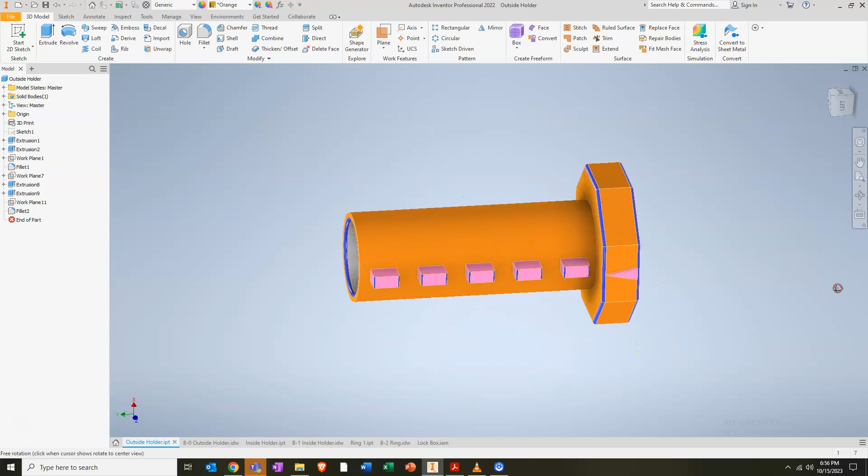Here's the part before we get started. So let's go into new, let's go to a standard part. What I'm going to do right away is a file save as, and where I need to save this in my OneDrive, like you all are already doing, is in drafting, 3D printing, weekly projects.

This one is going to be called WP6. There's various projects we're going to do throughout the year, and this is going to be a 6-week project. I have other videos of other projects, puzzles, hinges, Christmas ornaments, Halloween ornaments, and all that fun stuff, but we're going to do the 6-week project.

Inside here we're going to make two different folders, one called parts and one called assemblies. Remember, you've got to have all of this done in your OneDrive. So we've got parts, assemblies, and drawings. We're going to be in parts, and this one is going to be called B-0 outside holder.

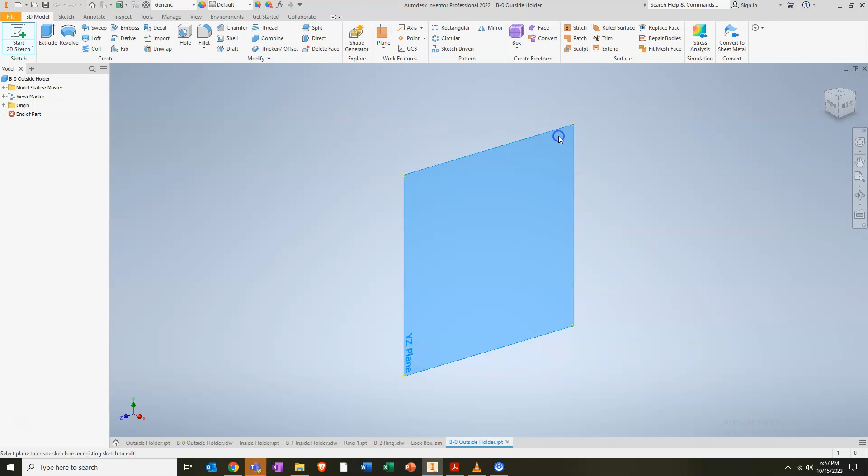I want to make sure our parts are all named appropriately before we get started, and I'm going to start on this Y and Z plane here. What I'm going to do is steal dimensions from this to kind of gravitate our way through making this part. I can tell already that I need to be at 29/32nds with 3/4.

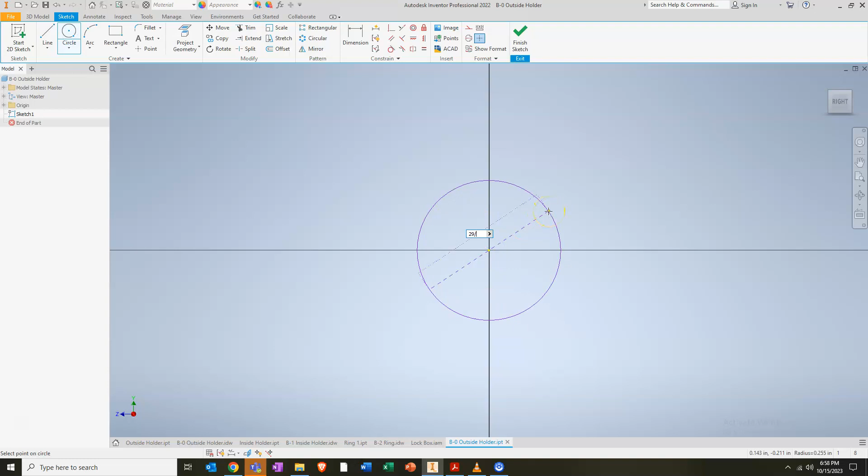So we're going to come into here. I'm going to start one, I'm going to type 29/32nds and 3/4. Remember, you can do decimal or fraction, but either way, when you pull up, they'll show your fraction, but they'll keep them in their decimal format.

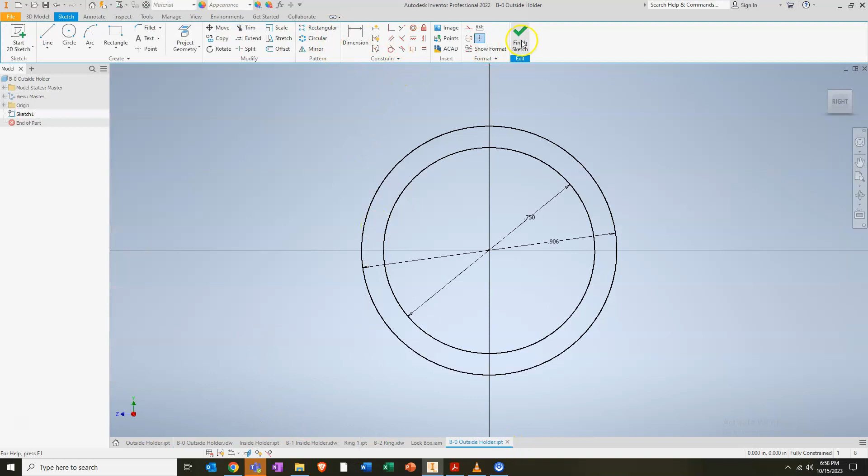Alright, so now that I have that part, what I'm going to do is kick it going forward 2 3/8. So let's finish our sketch and kick it forward 2 3/8. I know the decimal format, so I'm going to type it. Now notice I did the whole thing, but remember, I've got to kick it going back the other direction too. So I'm going to draw the entire sketch first before I extrude it the other way.

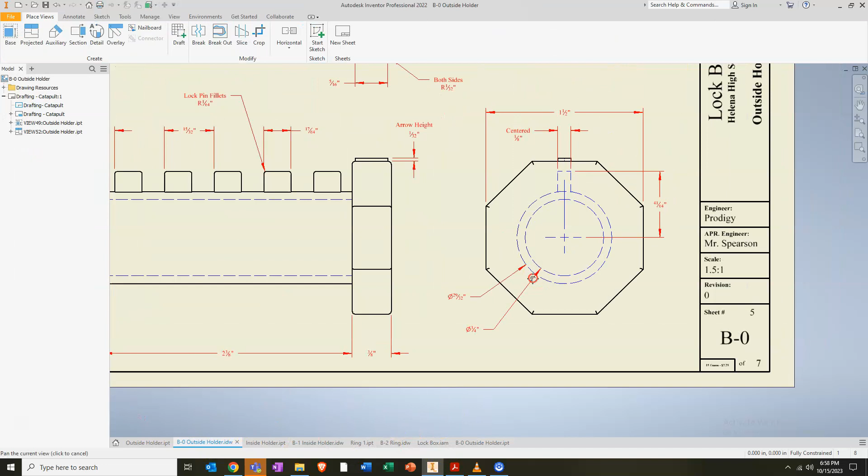So let's go back to the original sketch. Now what I want to do is bring up the overall diameter, which is another circle of 1.5 inches, and then I'm going to put in something with 8 sides of a polygon. So 1.5 inches, here we go.

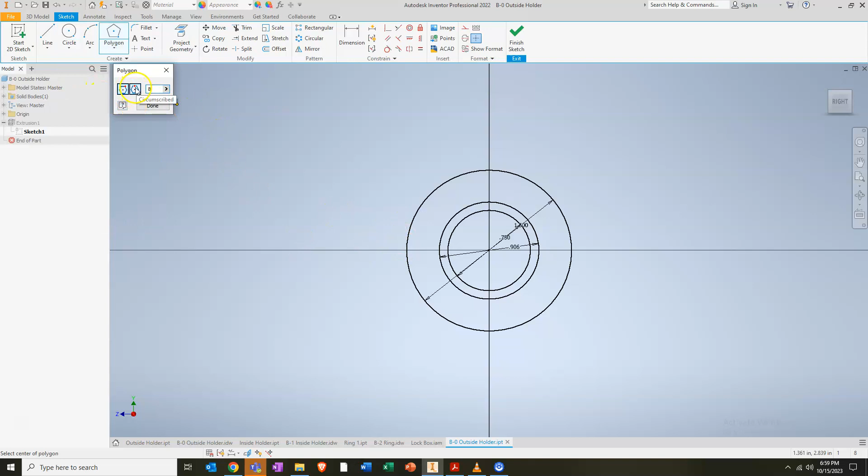I'm going to go right underneath my rectangle. I'm going to click on my polygon, and I'm going to choose 8 sides, and I'm going to choose the circumscribed or inscribed, however you want to pronounce that. And there's that. Now, as I'm staring at this, I can tell already that this will have to be another sketch on top.

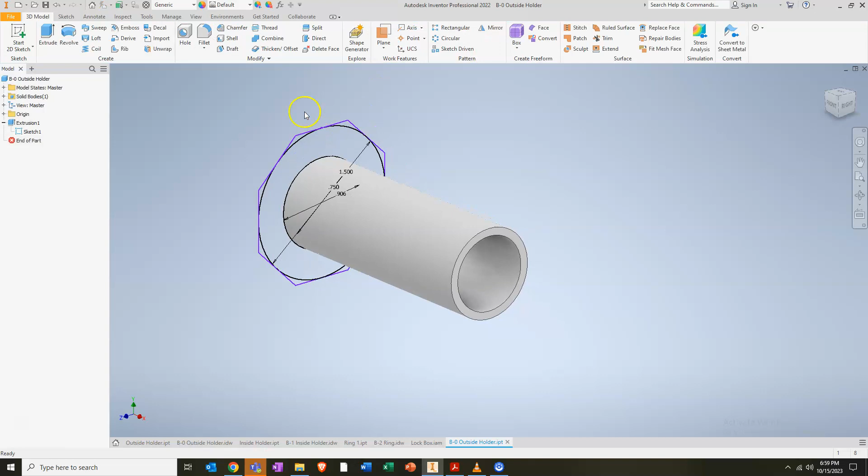We're just about done, crazy enough—this project goes fairly quick. Now that I have that, I'm going to bring this back up and select the entire thing. But this time I'm going to flip it this way, and I'm only going a certain distance, and that distance is going to be 3/8.

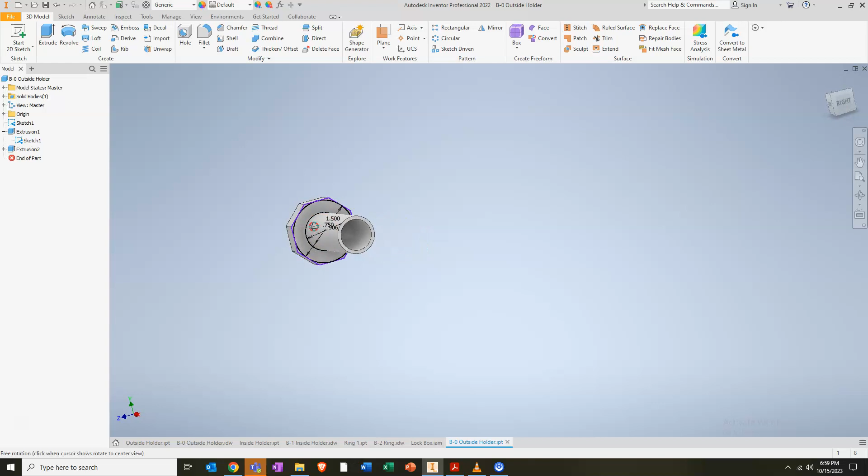So we're going to type in our 3/8 here. And there's that. Now what I want to do is get rid of the visibility on my sketch.

Now I can tell when you're using original sketches because sketch 1 will come up above however many extrusions you use with that original sketch.

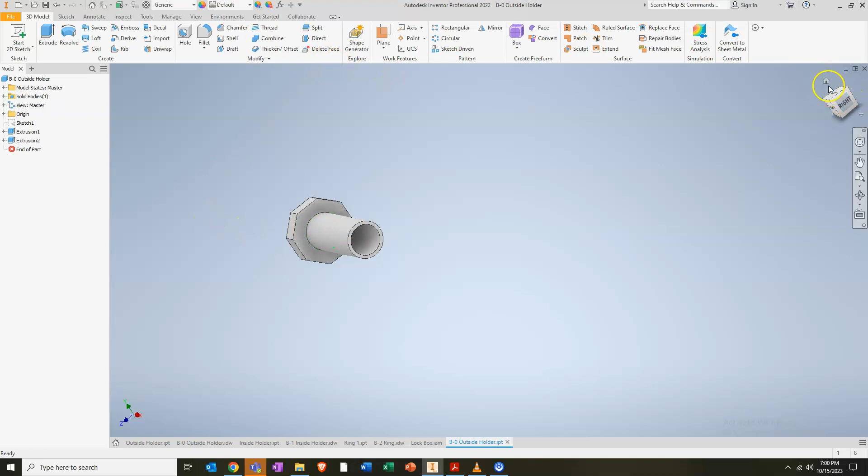And what I want to do now is draw something out on this surface here. So I'm going to click the view that I want. I'm going to choose my right side.

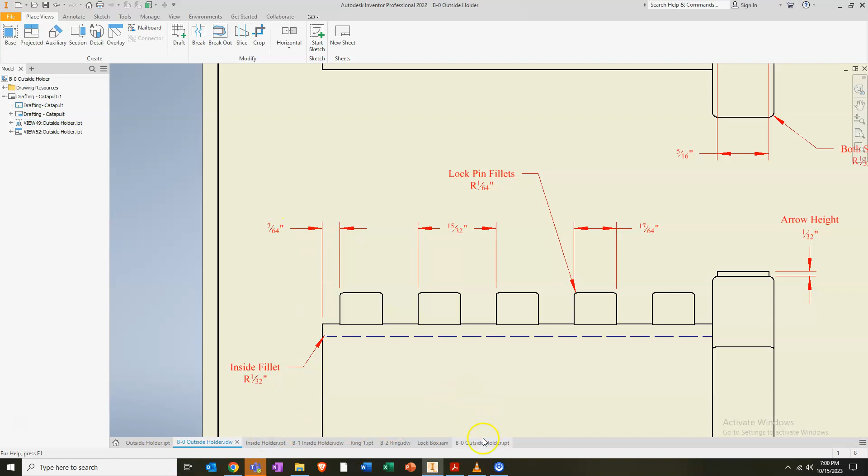I'm going to select this plane, but I'm going to do an offset from that surface. As you can tell, it's going to want to kick it this way, so I'll have to type in a negative amount. I've got to come back 7/64ths, so Control A, negative 7/64ths. It kicks it back. Now there's a sketch here that's come back that distance.

So I'm going to go ahead and start it. Now remember, that sketch is not on the surface, it's inside here. Right now, that's what I'm drawing on.

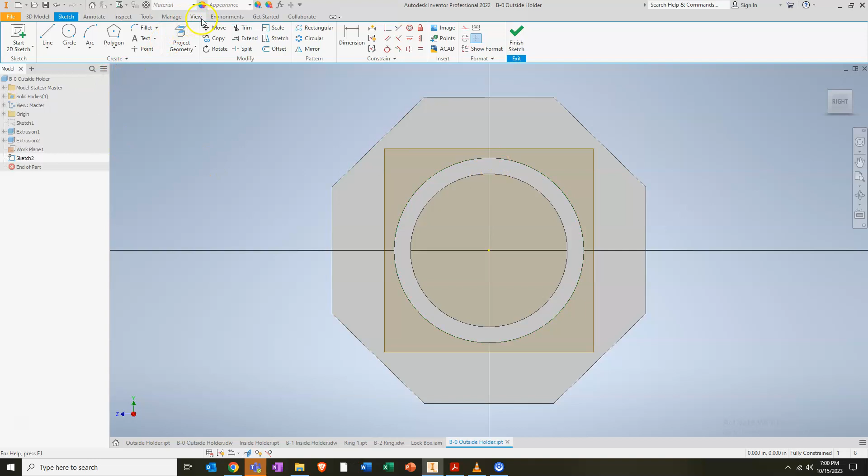So what I want to do is slice the graphics in my view so I can actually see what I'm drawing on. I want to go back to my sketch and project the geometry of this object, then go back to my drawing. Now I want to draw essentially this right here.

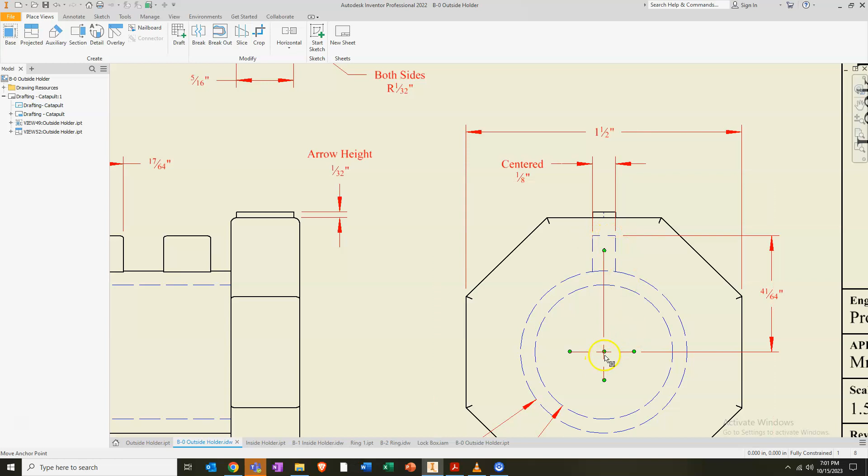I can tell already that this thing is centered in the middle, and it's an 1/8 inch wide. Now I'm 41/64 offset from here, and that's to the actual perpendicular plane of my X and Y center.

41/64. Now the cool thing is we can just draw lines, we don't really care. Then on top of that, after we're done drawing lines, we can dimension our stuff after the fact. So we know from here to there it needs to be 41/64, and we know that from here to here it needs to be an 1/8 inch.

Now I also need to extend my stuff so it touches. Then I want to trim my object, I want to trim it here too. But I need this thing to be centered.

So I'm going to do a vertical constraint, and I'm going to select this plane with the center. Now the reason why I was able to do a vertical constraint was because my cube is oriented in the actual plane that I'm drawing my horizontal and vertical constraints in.

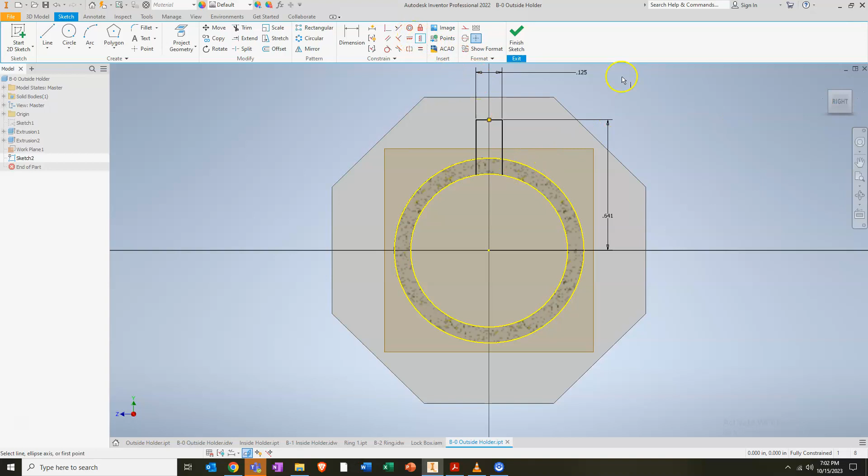Sometimes if your cube is rotated like this, you think you're doing vertical, but in reality you're most likely doing a different set of planes because you've got to remember the way your cube is rotated. So if you're having problems, that could be one of your issues.

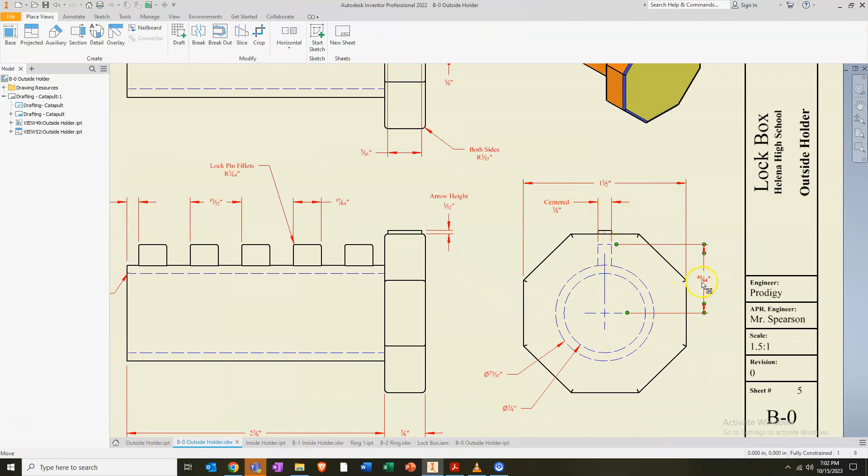All right, so let's go back to this. We have come in 1/8, we are centered, we are 41/64 up. We know that we come back this. Now I need to extrude that.

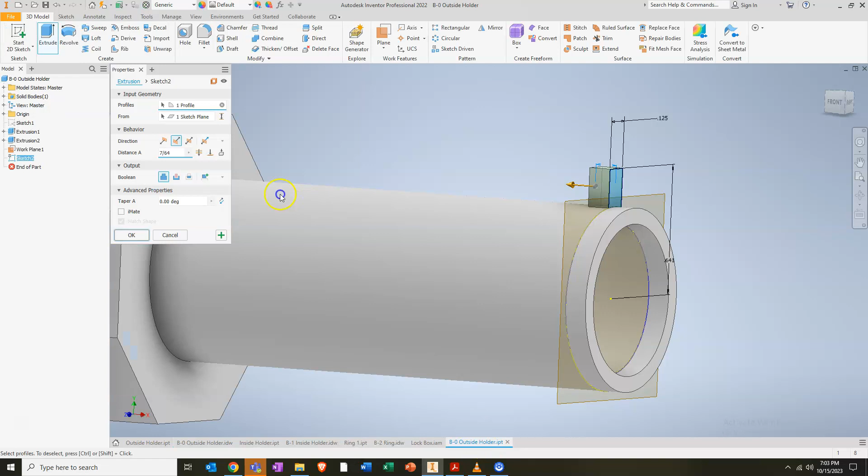17/64. So I'm going to go ahead and finish my sketch, and I'm going to extrude this now, and kick the direction. I think we said 17, or 7/64 maybe. Let's double check. 17/64, my bad. So 17/64, and I'm just going to accept it.

Now I have a plane here, and if I rotate this, you're going to notice that it's at the very front of this object. So I don't want to see it, let's get rid of the visibility.

Now instead of just making these planes, what I'm going to do is turn this into a rectangular pattern by doing the sketch. Now if I can get this screen out of my way, there we go. I've selected my feature, not a solid pattern. A solid pattern would be doing this entire shape and then flipping it on a plane, but I'm looking to do a feature, and the feature that I'm choosing is that.

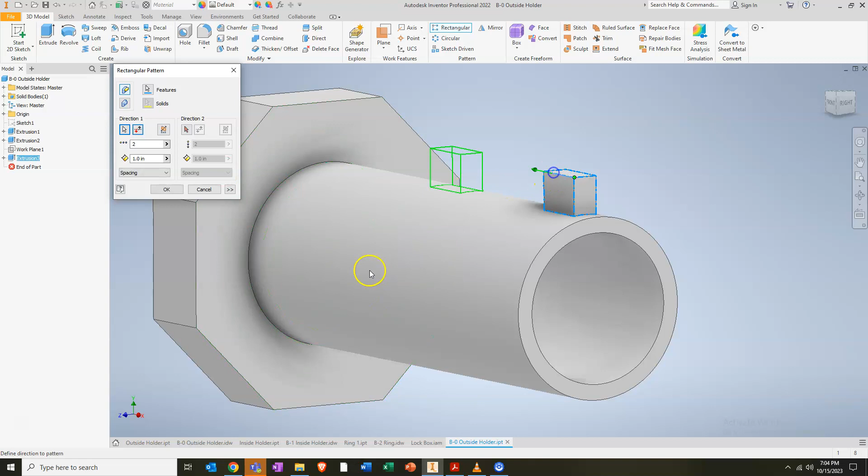In the direction, I've got to choose the direction I want to go. Remember how many did we have? We had 1, 2, 3, 4, 5. And I need to be 15/32nds from front to front. So we're going to go 5, sorry, 5 of those, and I need to be 15/32nds.

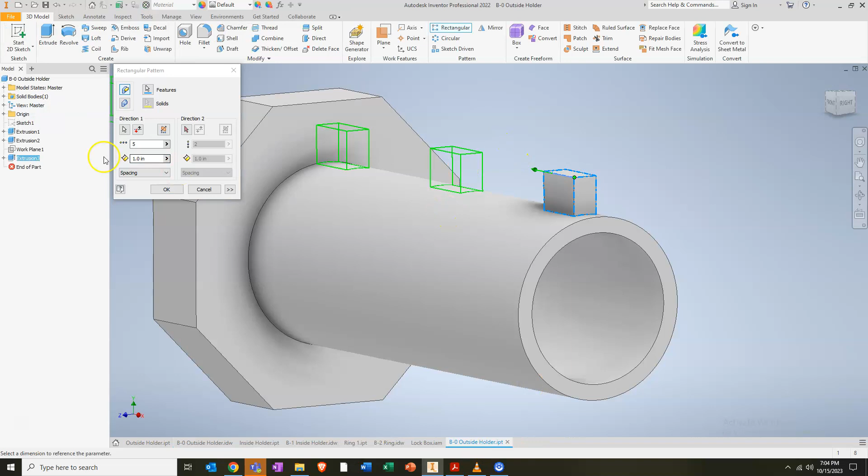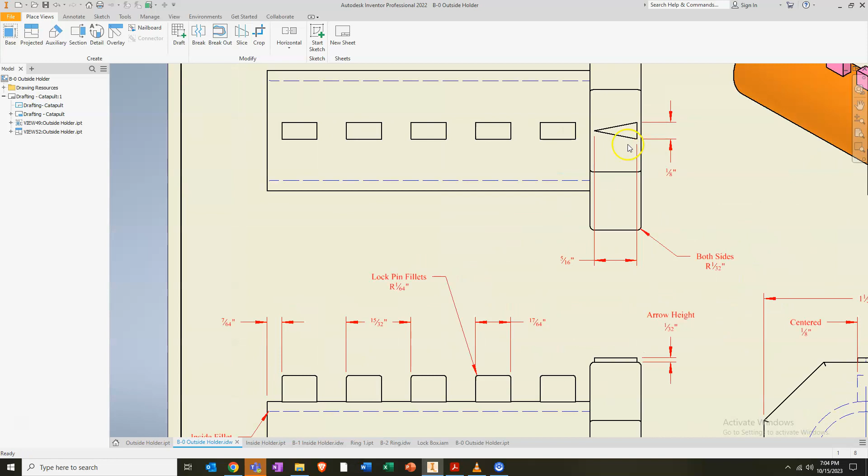There it is. Now the real cool part about this is once I do that, it's really pretty self-explanatory. Before I start doing more, like my fillets and whatnot, I might want to put this arrow on, centered to the top to represent the actual alignment of all the pins. If I got rid of some of this visibility, you would see them needing to line

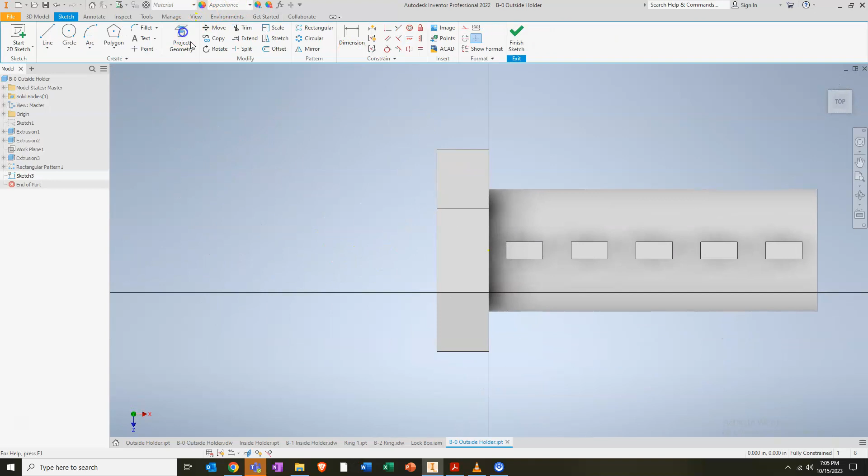up in order to actually open the lockbox. All right, so we're going to go back to the sketch. I'm going to select it once, right click, say new sketch, and project the geometry of that plane. Now what I want to do is just draw something first. Remember, nothing really has to be specific on length because we're going to dimension it.

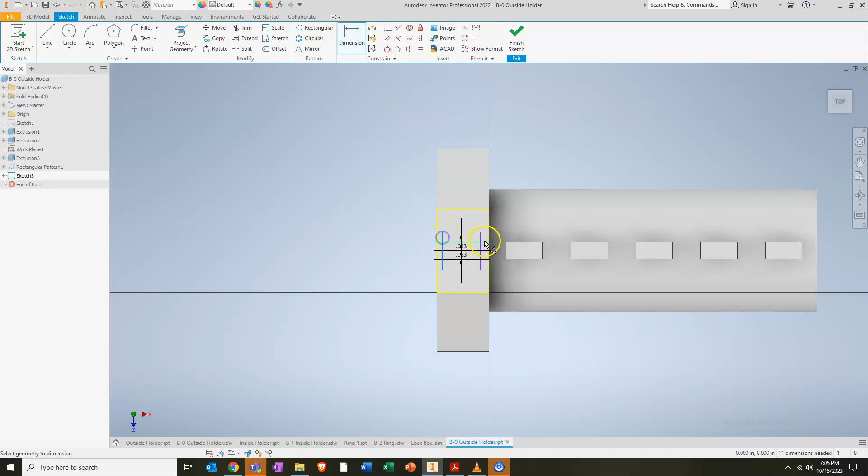I know I need to be an 1/8 inch and 5/16 long. Let's offset this. It's got to be an 1/8 inch, so half of an 1/8 inch is a 16th. And then I know that my arrow—remember, I'm just drawing randomly, I really don't care—the distance here needs to be 5/16. All right, now I'm going to go ahead and cut this stuff away so I can actually look at

what I'm looking for. Boom. I also got to make sure that it's vertically centered. So remember, my cube is right. I'm going to do a vertical constraint. I'm going to select—hey, this needs to be constrained with that—and it shifted it.

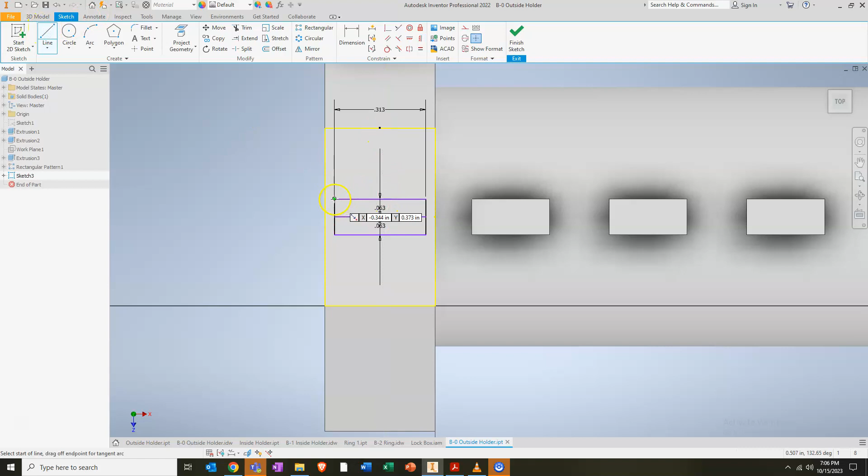Now I'm going to give it the arrow. You can do whatever you want. If you want to do an arrow, or a different symbol, go ahead and do it—perfectly fine with me. Let's come back to here. My arrow height, let's see, is a 32nd high.

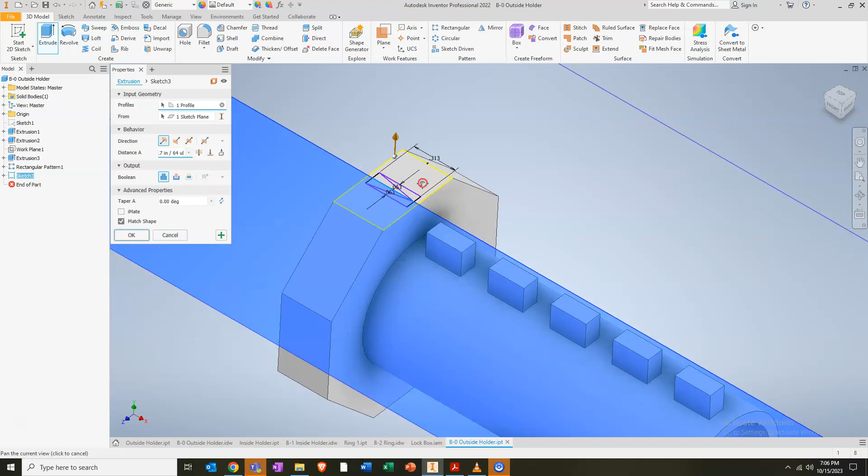So now that I'm done with my sketch, I'm going to finish it, and I'm going to extrude this a 32nd high. Oops, my bad. Let's extrude one more time. Let's go here, let's go there, let's type in a 32nd. That is done. Okay, let's get over to here.

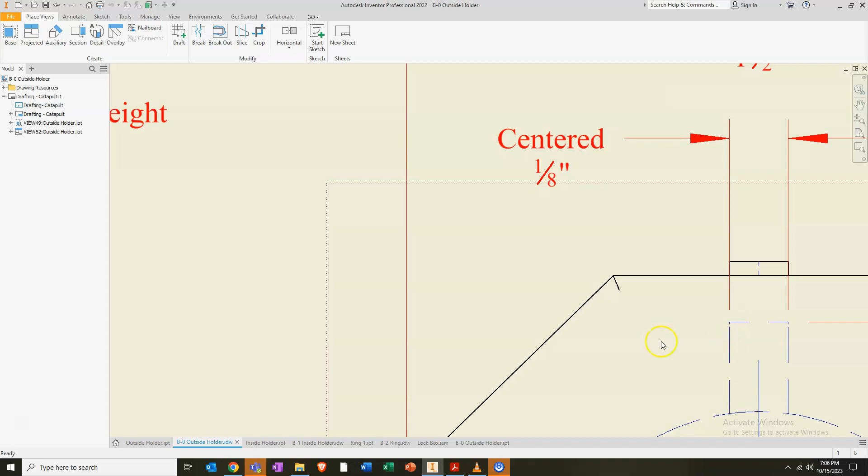Let's find out our fillets. Oh, it looks like the lock pin fillets are a 64th, which just go around here. Notice they don't go around the actual side here—they only go around this. As we kind of navigate our way through this assembly and building of each component, you'll see the reasons why I don't fillet that. I need tight tolerances, and I want to make sure that things are sliding on nice and snug.

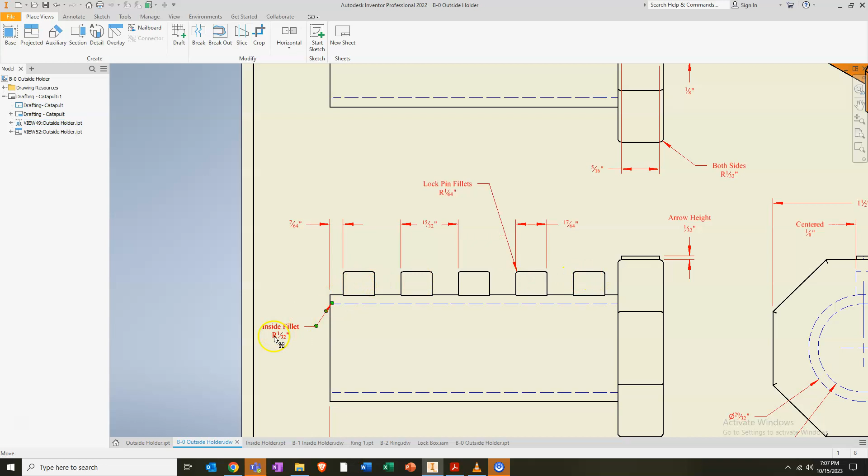So we're going to do a 64th fillets around these, and at the same time I'm going to do this here. So get back into it. We're just going to select this and those, and we're just going to kind of go fast. Now, if you really wanted to be quick, you would have put these fillets on before we arrayed it, but we didn't do that, which is okay.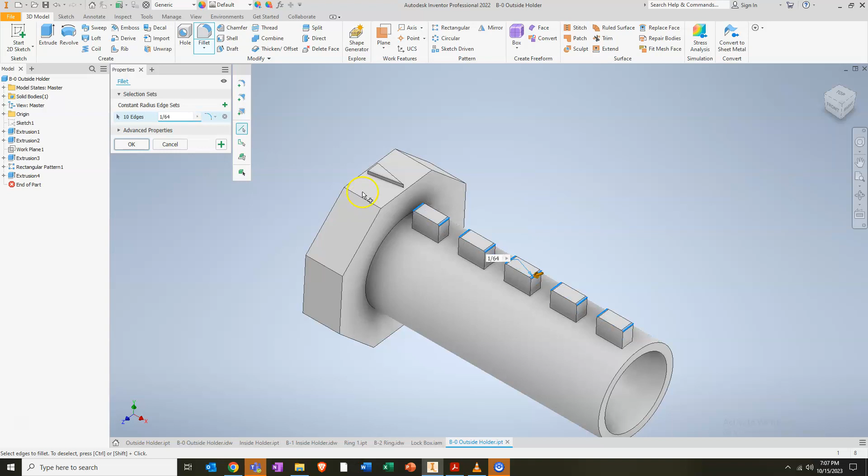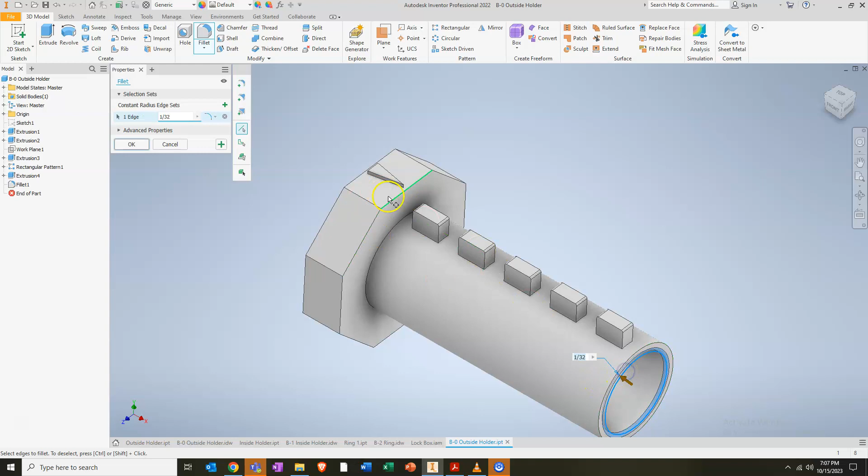There's that, and then I think there's one other fillet. It looks like both of these are a 1/32, and the inside of this is a 1/32. You can't quite see it in that view, but I designed it so I know. So we're going to type in a 1/32 first, go to inside, and now I'm just going to go ahead and start having fun clicking on some stuff here.

You'll notice I might be moving a little bit quicker, but that's okay. That's the best thing about these videos—you guys can pause at any time you want and put in what you need, slow down the video, and do what you have to do to get everything drawn up.

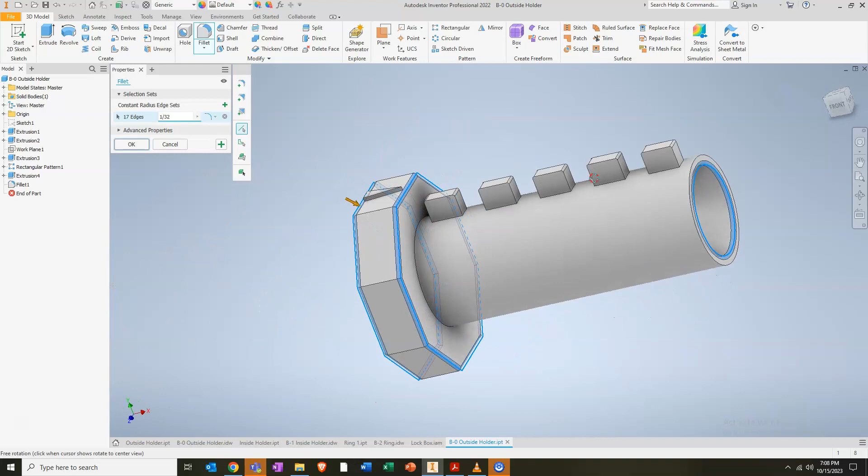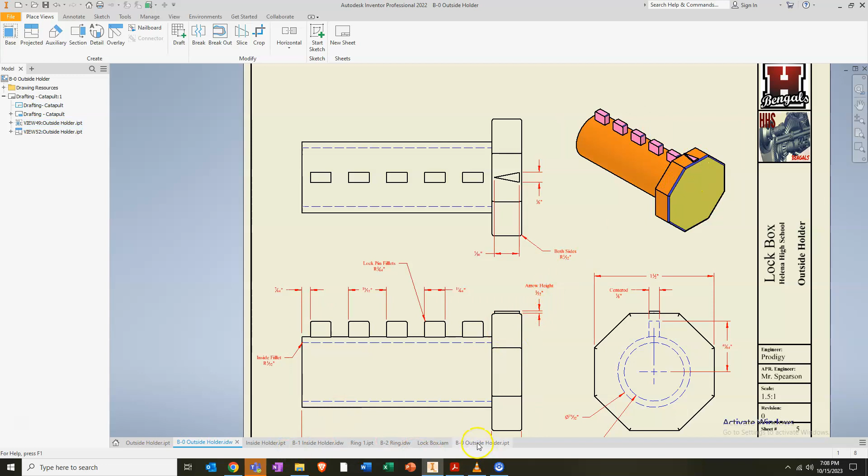All right, so there's that. I'm good here, everything looks good. Now before I get going with anything else, what I want to try to do next is make sure that my cube is orientated in the right view that I'm looking for. Now in my drawing, I have my cube on the other side, my actual arrow. You can, if you choose to, always rotate these by just clicking on them.

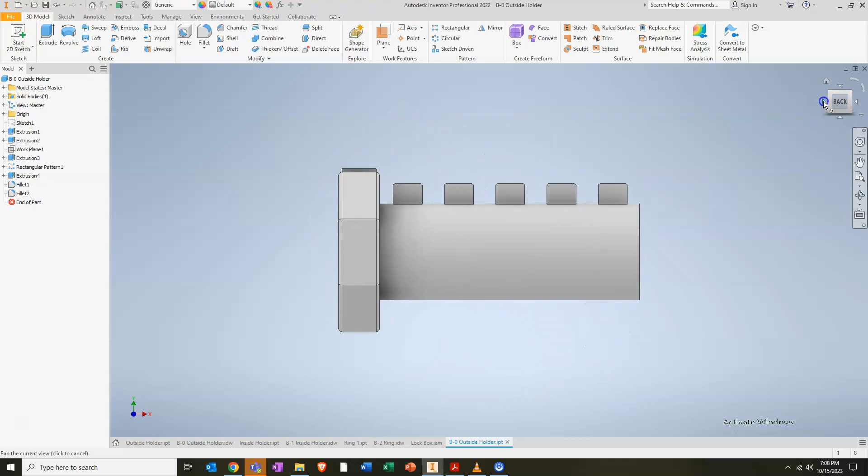If you want the back to be the front, right-click it and say you want that to be the front by setting the current view. And if I want my isometric - remember isometric is front, right, top - if you don't set that, when I hit home it's going to default back to what it originally came as. Here's my ISO view that I'm looking for, and that's going to be the actual home view. They don't label it as an isometric view, but that's kind of what we shoot for.

All right, our model is done. Let's throw some color on it.

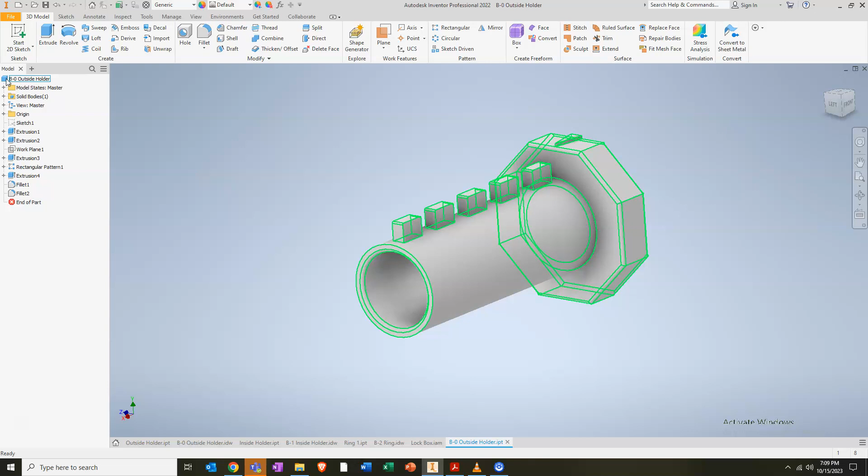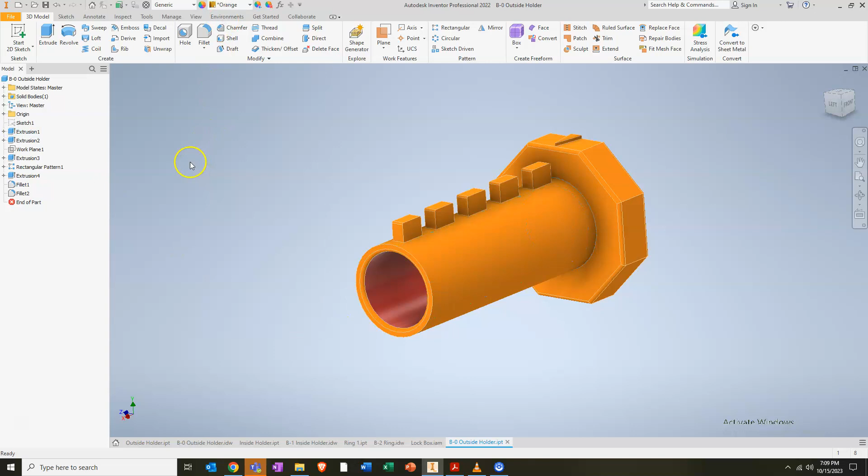A general rule when I'm designing something, going through the preliminary designs - let's say the five design phases - I always like to do my extrusions with different types of things, whether it's shapes, models, or fillets. I like to make something a generic, noticeable color like orange, then make things a little different and say the inside is going to be red, that way I can see it when it pops. And I don't know why, but my fillets are always blue. They just seem to show for me, whether that's with old age or whatever. It just makes it easy for me to see.

Now I'll go ahead and make this arrow by holding Control and selecting both of them, and I'm going to make them both pink. As you guys can tell, I did the extrusion but I didn't do the array, so I've got to make sure I select that too and change that to pink too.

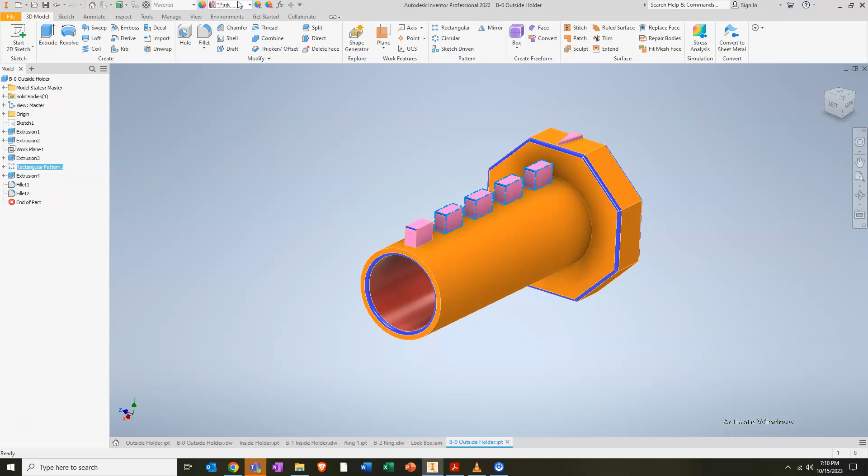All right, so here we are. This is the one component of the outside holder, and I've saved it in my appropriate spot.

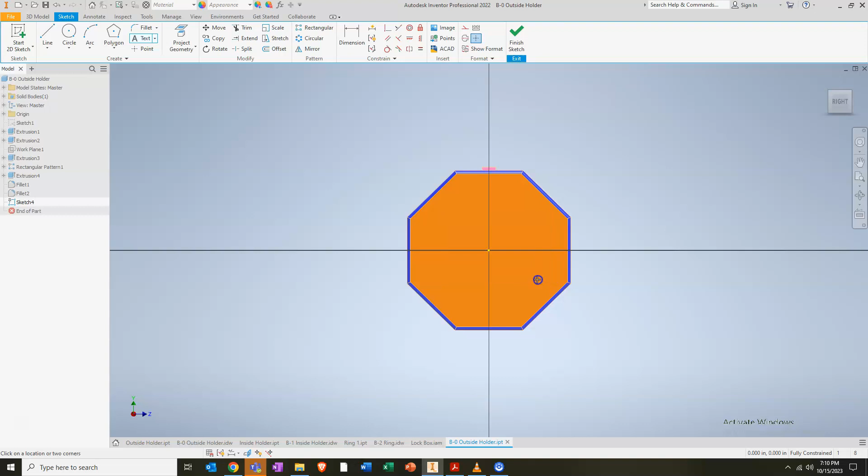If you want to put different sketches or different things on these instead of an arrow, or if you want to put your initials, just start a new sketch, put on some cool stuff, and start - say your name or whatever you want to do. Change the font size by selecting it and then changing it. Notice it's really big.

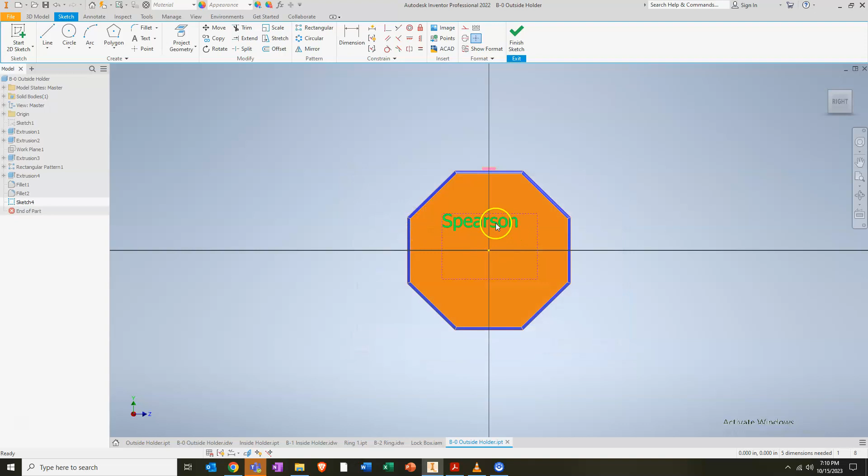So an eighth inch or a quarter inch might be too big, so let's change it back to an eighth inch. You've got to remember this thing's fairly small. I also want to make sure I'm centered, middle justification, and then I want to align this. Now remember, this is all different than what I'm doing - I'm just showing you different various things you guys can do. You can put logos on there, you could do really whatever your heart desires.

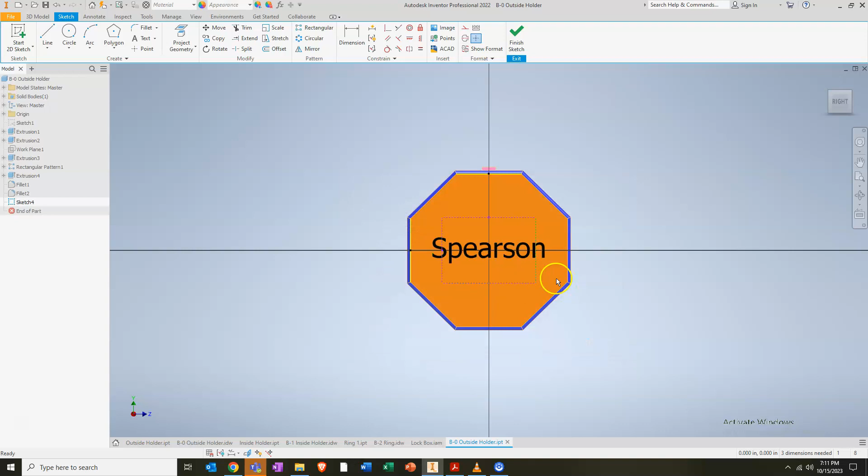I'm going to do the 3/16. That looks pretty good, I'm going to finish it. And then I'm going to extrude that surface coming out - bring that out, 1/32nd too. The cool part is when this thing prints, it's going to print pretty cool.

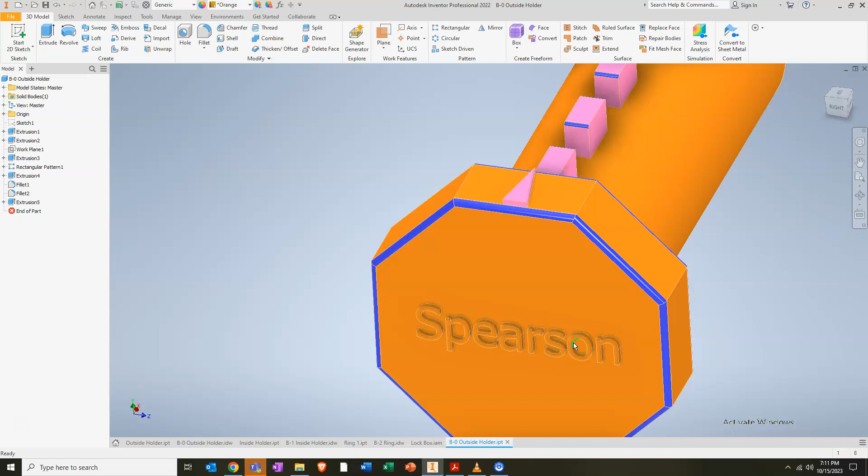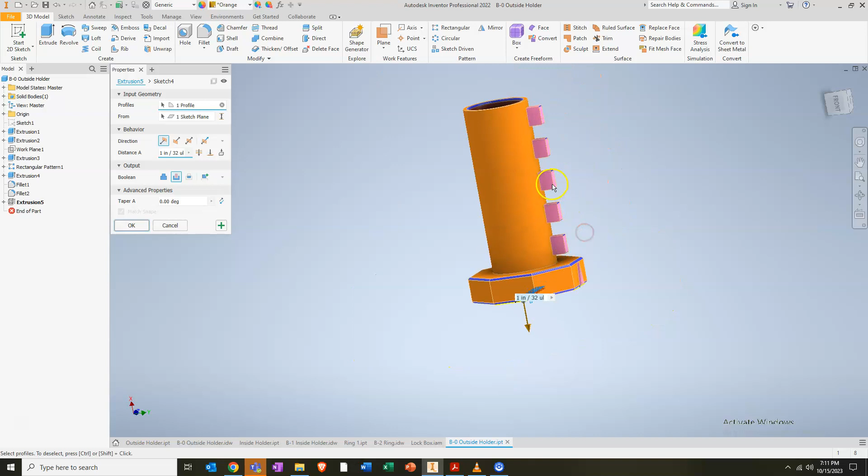One thing I will say though, if you are going to print this and you want to put something on here, for our best printing options without having to print with support material, this model needs to go in - so I'm going to flip it to a cut, because when it prints the support material underneath here, it's hard chipping this stuff out, it's just a lot more work. Our printers have the capability of going at 90 degrees and holding that up - just with a little file you can get it done.

So we'll flip the direction to make sure it's cutting. I'm going to say OK, and then of course there's that.

So yeah, this is your first part. As you watch the videos as they go through, you're going to notice that we will eventually start assembling this thing. But here is your very first part.